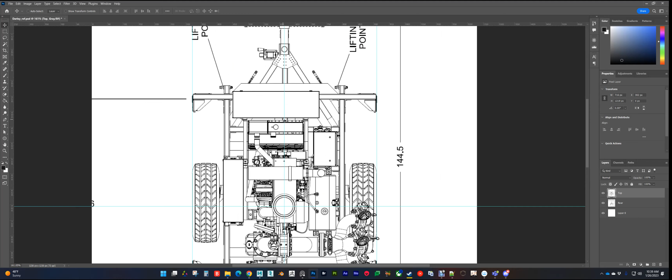So in Photoshop, I prepare the orthographics that I find. In this case, I only had a top view and a rear view, which absolutely sucked for this piece of equipment. Everything on the left and right sides and the front was difficult to set up. But at least with the top view, you have an overall size, dimensions, and proportion of everything, so you can fit everything together within it.

The rear view was helpful mostly for placement. Because if you have a top view and one side view, you're pretty golden, and then everything else can fall into place.

So I generally go in here and put my guides in and line things up, making sure however many reference orthographics I have, they all line up. I also make sure the image is a 1-to-1 ratio, meaning it's a perfect square.

Going in here, this is my scene set up in Maya, and I just have two image planes: the rear image and the top image.

Now the problem is I have to start on the frame first, the foundation. That's the most obvious place to start. But the frame is underneath what I can see based on this image.

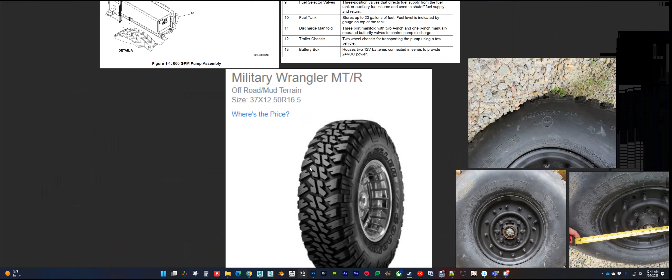Also, as far as measurements go, when I use the reference, I like to get information on the tires themselves. So if I go to my ref board, I actually looked up the tire itself, and there were different variations of it. You can see here the treads are different than the ones that I did.

So this is what it actually looks like. I did that, and this is a general tire that's the same measurements. So I use that as a starting point to figure out what size to make the tire to begin with. I went to the manufacturer's website and got some info, including the tire size, and used that as a basis for the entire thing, for my overall measurements. Because as long as the tires are right, you have a good foundation to start with. So it's always good to start there.

So next up, let's open the next file in the series.

Here I mainly focus on just getting some of the boxes that are on the sides. This one's on the front, and this one is on the left. Again, if I look at the reference from the top view, you can actually see the box here and the box here in the reference, so I have perfect dimensions of what they should be.

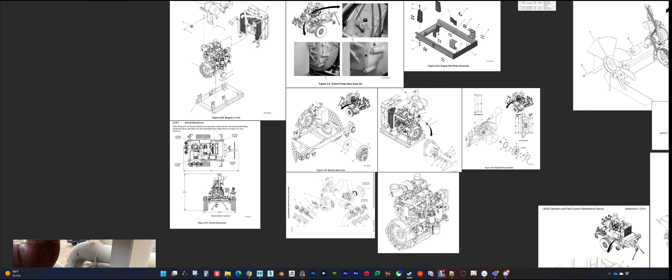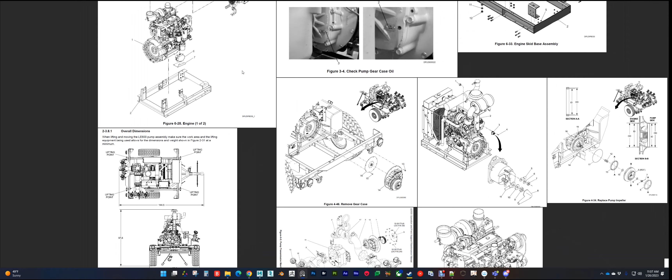Alright, so PureRef, I had to close it and restart it, but it's back up. So the only thing I had for doing this massive engine was an orthographic, well, no, a 3/4 shot here, and this one is a little bit bigger so it's easier to see. But of course, you cannot get any type of perspective or placement of any of these from this angle.

And try to put this in a 3D space. This is also the other angle I had, and that's it. So, from the actual orthographics I have, you cannot see the engine at all in either view.

So building this engine was the hardest thing I've had to do here, just because it was a bunch of fuck around to find out, to be honest. Just moving things around. There was like adjustments all the time.

So I started with a block out just to kind of get the volume of it. I made these really basic shapes, just to kind of get it started.

Because I had basically no visual information I could use to identify the placement of anything on the engine, I had to build everything around it first. That was the only way this was going to get accomplished.

So I could see everything else around it here on the orthographic here. So that's mainly where I focused, was everything else but the engine. The engine was the very last thing I did.

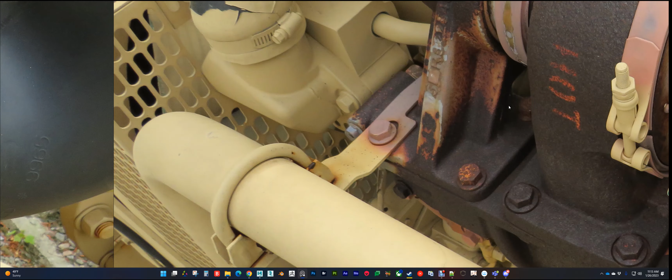And more piping here. This section was interesting - I did have really good reference of this as far as pictures go, I believe. I had really good reference of the overall shape, but the specific parts you couldn't see from the opposite side, I just had to figure out. You can kind of see how this comes down at an angle - it's not straight up and down.

So there's a lot of very specific, unique shapes in this model that I had to build. A lot of the geometry I could not reuse, except of course nuts and bolts - they're always going to be the same. But the actual shapes these plug into were all very unique, which made the process a little slower, plus doing a ton of adjusting the entire time.

This piece here, I was able to steal from another model I did on the pump rack module, so that was easy to adjust and make work for this one. And this shape too, I brought it in from another file I made and had to make adjustments to get it looking how it looks here. But some of these are reused from other scenes, so that actually did save a little time.

And next up - so this is file number 8. Next one I want to go to, let's jump down to 12, so we can show more of how I blocked out the engine.

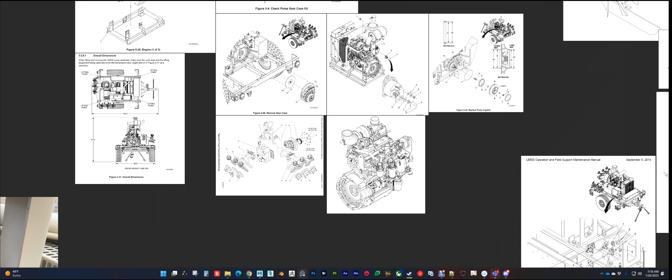So if I go and look at this, I pretty much had... yeah, this. I had to do mental gymnastics to try to place this in perspective based on this image. That was very difficult, a lot of trial and error trying to get the actual placement. I even tried making a plane and putting this image on it, then overlaying that over the viewport to match it up exactly from this angle, just so I could place it from this perspective inside my scene.

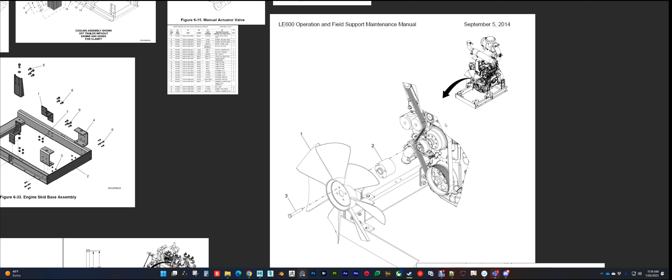That kind of worked, kind of. It was helpful, but ultimately it was all wrong, and I had to change it multiple times. But that's all I had to go off of, just that. And translate it into this. Of course if I hide the fan you see it better. Translate it into this. This is really hard to set up.

But once I got the placement of everything that I thought was correct, that's when I went back and fed the belt around it. I pretty much did a plane all the way across, connected it, manually extruded it out, and gave it some thickness. So pretty straightforward.

Let's go to the next file. Open scene. Next one I want to jump to is where I started to detail a little bit more.

Here I started to get into more of the detailing, and you can see there's more cables there now. And this big thing is here, I think this is a fuel tank. And finally the control box, the star here.